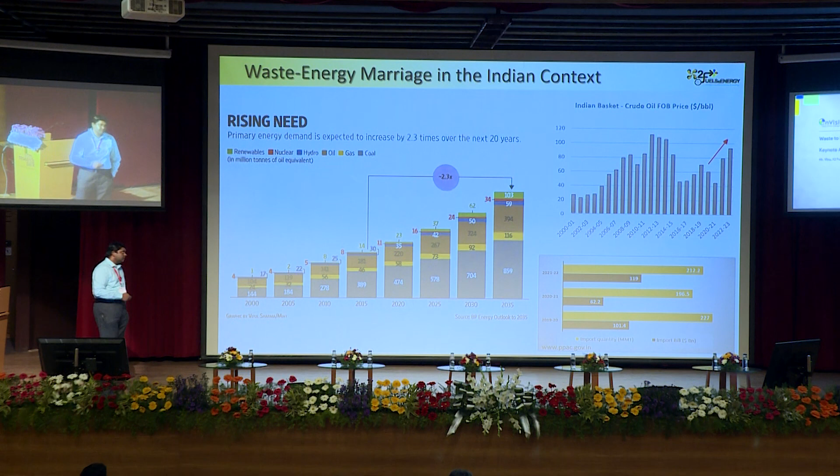So given all this scenario, and I've not really come to the waste part of it - if you consider what this waste is all about, today we generate different types of waste. And if I put all the waste together as something like municipal solid waste, these are the numbers.

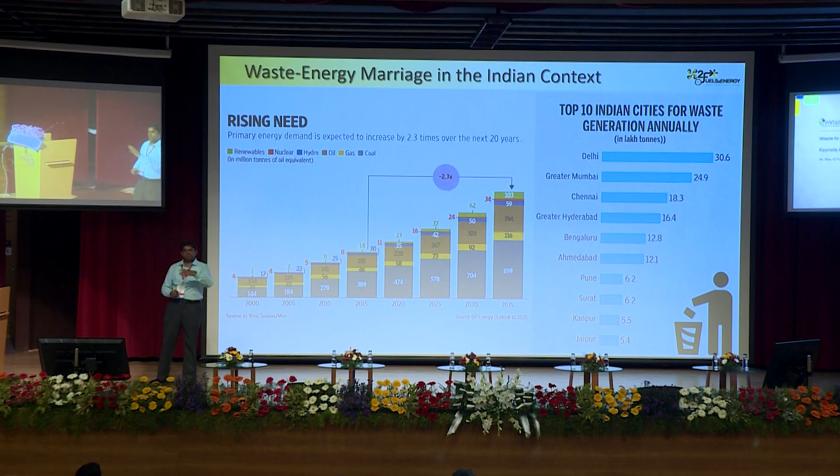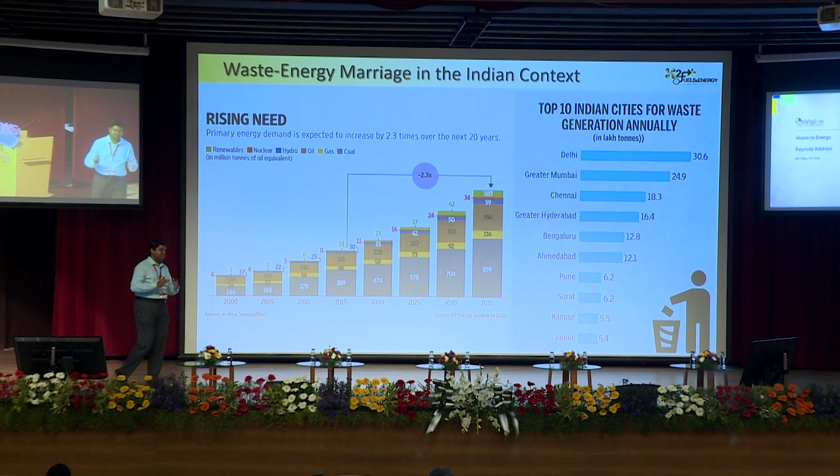The numbers could vary, roughly plus or minus 10% variation from various reports, but today this is the typical figure. For example, if you take Chennai, we generate about 5,500 tons per day of municipal solid waste, out of which roughly 50% is biodegradable waste, part of which is being composted and recycled, made into some value. And there is also a significant fraction which is plastics and other different types of components.

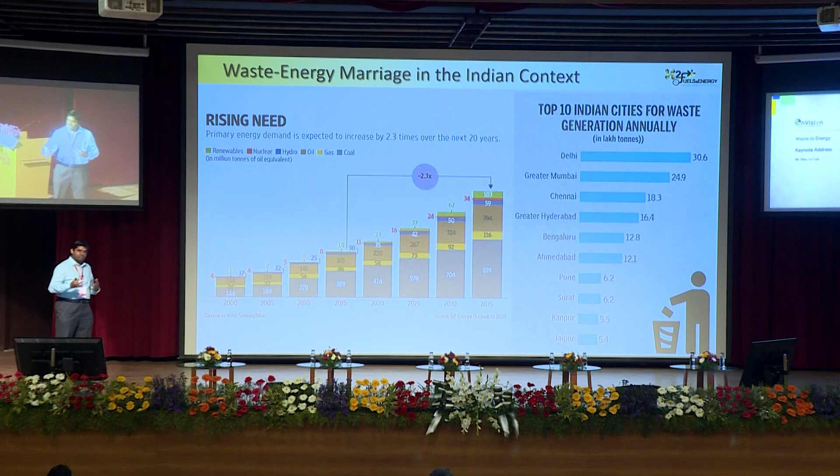Which is going to the landfills, and again, the landfills are getting converted to dump sites. A part of it is also going to some kind of incineration facility or waste-to-energy plants, typically cement kilns. And I think this is the typical Indian context.

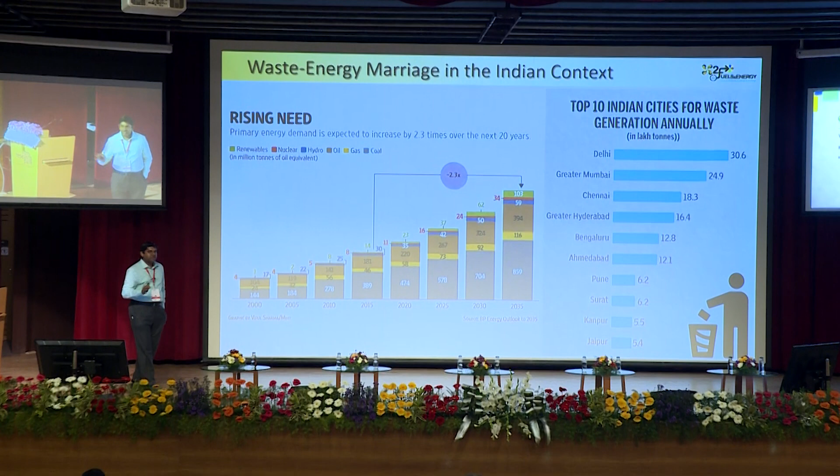If you look at this in a bigger perspective, I think this is not just applicable to Delhi - the Delhi Ghazipur landfill is always talked about, but every other metro city has a landfill, and the garbage is only piling up. If you look at this whole scenario of waste, are we really having a clear plan of converting the waste to any kind of value or even energy?

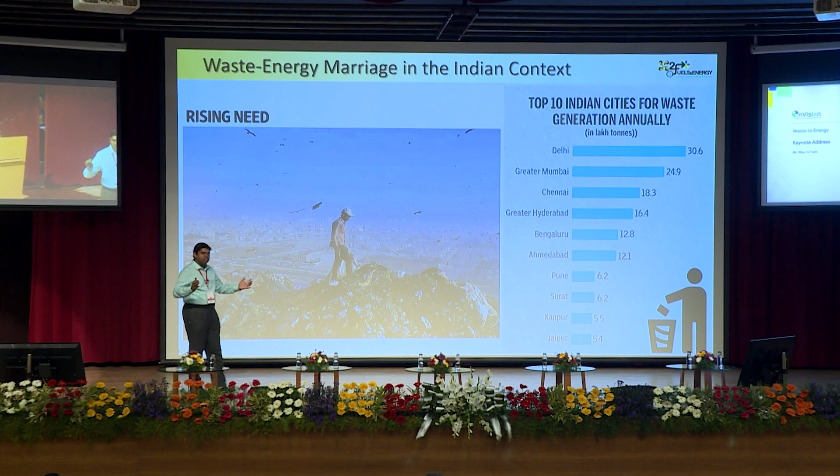I would say no. These are not really done at a very global level. Even if you look at the 500-page report of the International Energy Agency, you will hardly see waste to energy mentioned in just 2 places in a 500-page document. So that means there is a huge potential.

We agree that there is a huge potential, but because of the heterogeneity and many other aspects, it is not really targeted towards generating so much percentage of energy over different years.

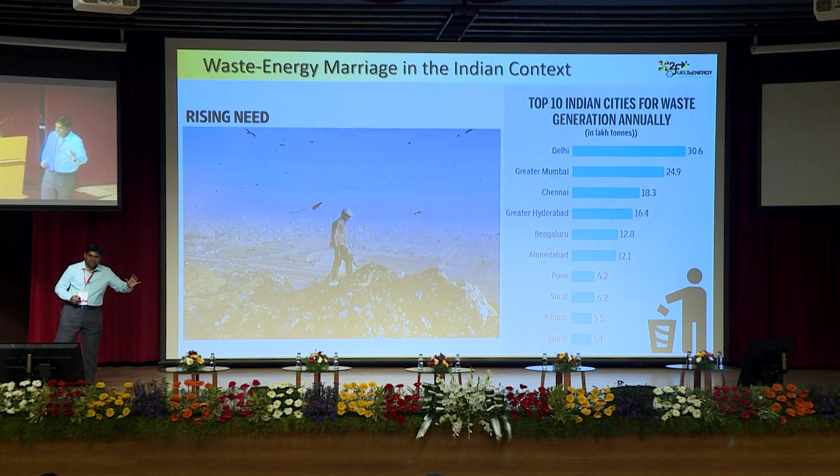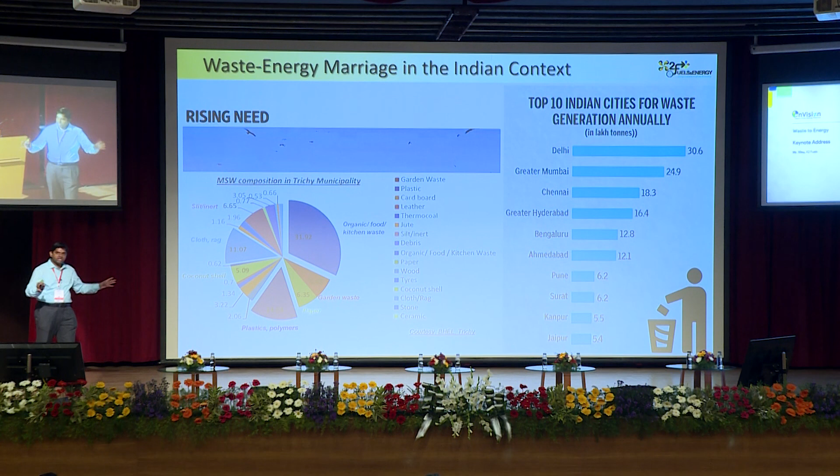So what is this waste all about, right? This is just a snapshot of the waste that we collected and did an analysis on. This is from Trichy. You can see that it is not just bioorganic or biodegradable, and non-biodegradable glass and metals - the 4 typical classes in which we segregate the waste at our home and dispose it off. It is much more. A typical waste is composed of too many different components, and remember, all these are actually there in the pile, in the landfills. You have past sins, current sins, and future sins that are also going to come up.

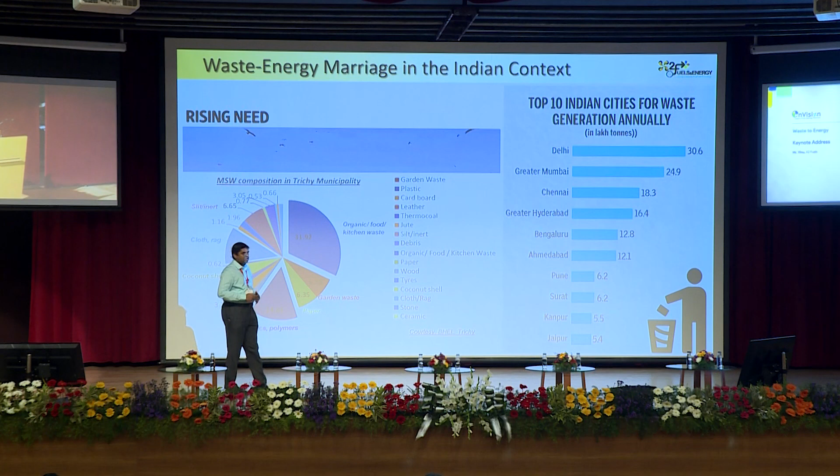So the problem is really big. What are we to do about this in terms of converting it to anything that is valuable? We, as a startup company, started in 2019 based on some of the early results we got from IIT Madras, and we work on a technology. I would also like to use this platform to popularize what we do, even though there are other tech options.

So we are trying to actually mimic nature's way - how nature has been converting a variety of fossil matter into crude oil, natural gas, and coal over millions of years. We try to simply do it on the ground over 15 minutes to half an hour, through a process called hydrothermal liquefaction.

The process is very similar to this, but the technical detail is that we try to pressure cook the material or feedstock, whatever be the waste - any carbon, hydrogen, oxygen, nitrogen, sulfur containing components. Let it be a mixture, let it contain water, it doesn't matter. We put it together in this glorified pressure cooker, as we call it, and cook it at around 300 to 400 degrees C, with pressures typically about 200 bars.

And when we do this over the ground, typically in about 15 to 30 minutes, what we get is an oil - this oil is something we call crude oil or crude oil equivalent, bio-crude. There are many different names for it, but this is basically the fuel. We try to mimic the crude oil that we get from underground, making it over the ground using this technology with different types of waste.

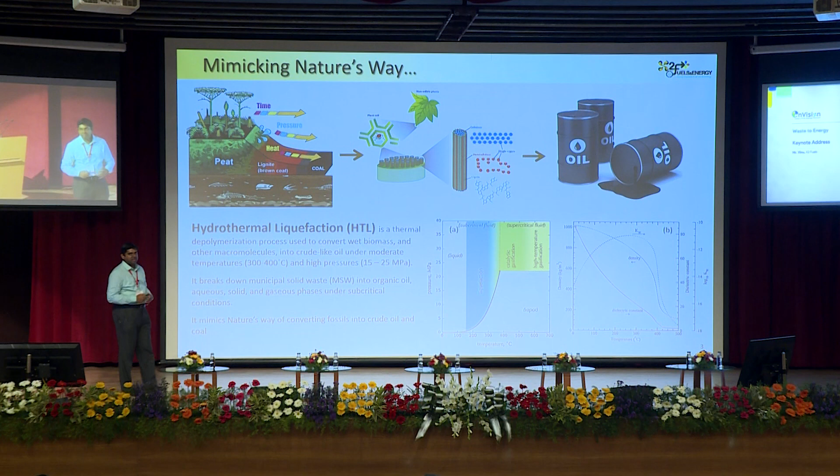So what are all the different products? Do we get only oil from this process? No, we get different product phases. We do get an oil, which is our key product. The next one is a solid residue, just like a coal or a biocoal, biochar - whatever solid residue, that carbonaceous matter you can talk of. So it has some applications in electricity.

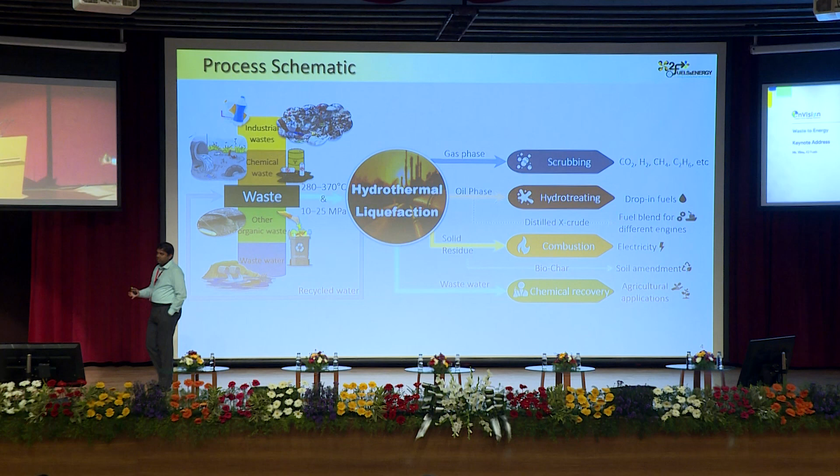That's like a low-hanging fruit, but we try to really valorize it and get it converted to activated carbon in such forms. We do get a gas phase, but again, the gas phase is not going to be composed of any typical incinerator gases like NOx, SOx - those kinds of gases do not form. It is going to be some amount of CO2, but I'll come to the point that we can still acquire carbon credits by doing this as a whole process.

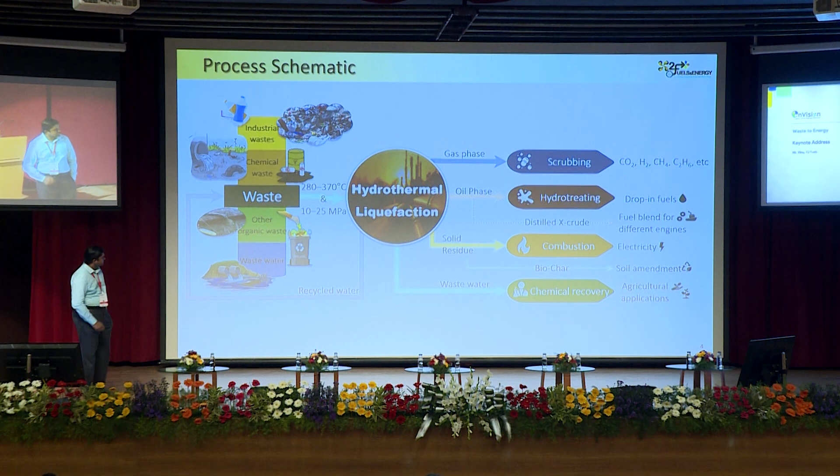And we get wastewater, which can be recycled, or used for a variety of agricultural applications. The process really stands out - it's a feedstock agnostic process. That means it's not a process just for biomass or plastic or anything like that. It can be used for any kind of feedstock, which is something we have validated in the lab.

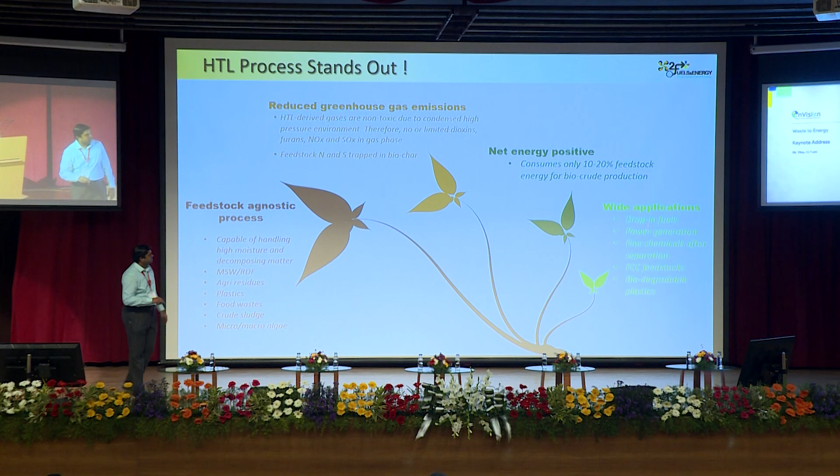The process is net energy positive. Typical process efficiencies would be about roughly 60%. Wide applications - as I said, the products have a variety of applications. This is just data to show that we have been dealing with a wide variety of feedstocks, including real municipal solid waste collected from dump sites and landfills, some industrial waste combined with wastewater put together, lignin which is a paper and pulp industry waste, and so on.

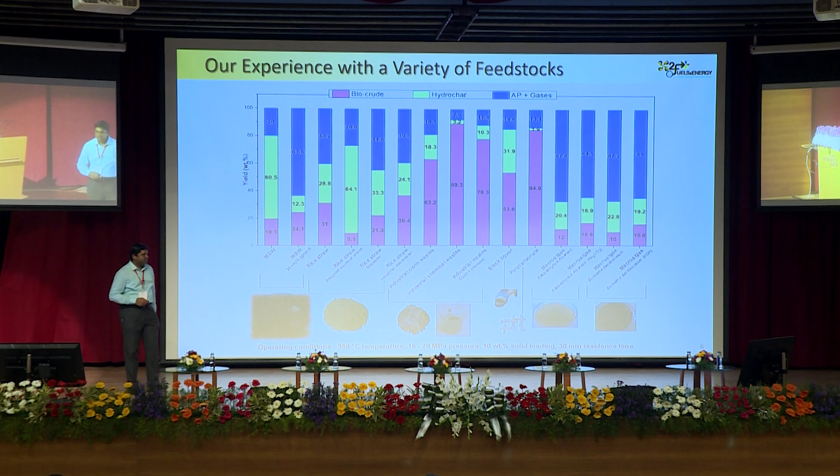What do we get? What is the product like? This is just to benchmark the quality of the products we get with typical crude oil and diesel. So again, we show different types of oil.

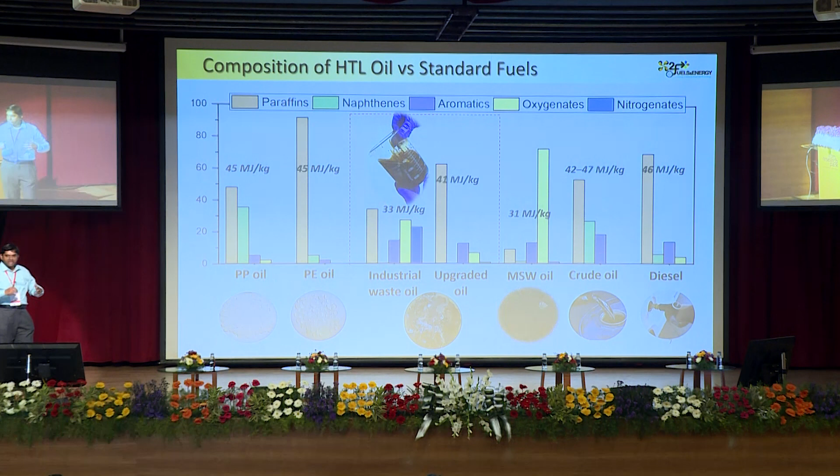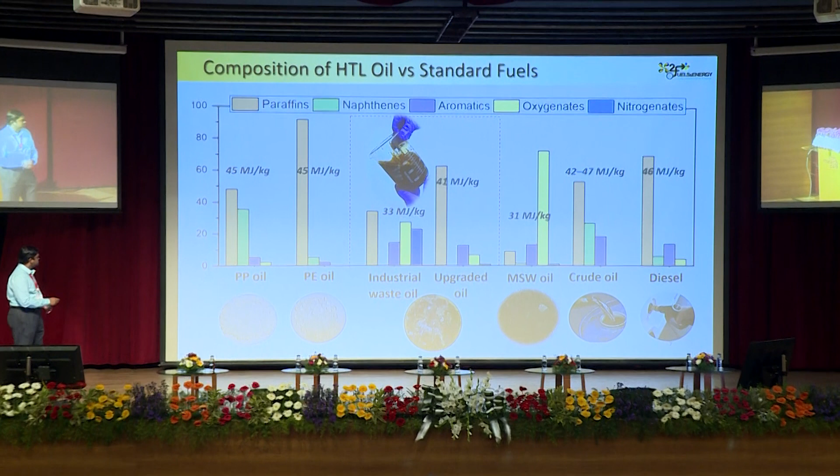So if you're going to derive an oil from, let's say, polypropylene or polyethylene, typical plastic packaging waste, because these are made from hydrocarbons, we recreate the same hydrocarbons. So we get oils which are typically of good quality from the plastics.

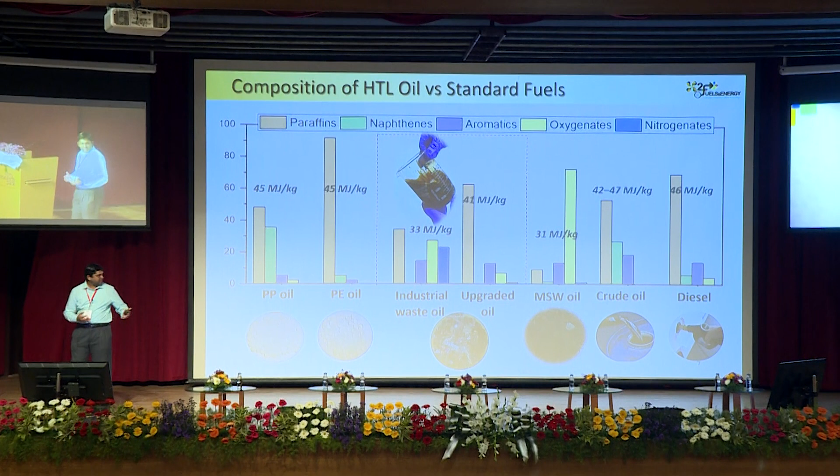If you take an industrial waste oil, which is a waste from one of the manufacturing facilities near Chennai, we convert this to an oil, and we can actually upgrade it, improve the quality by doing some upgradation strategies. We get it close to a crude oil.

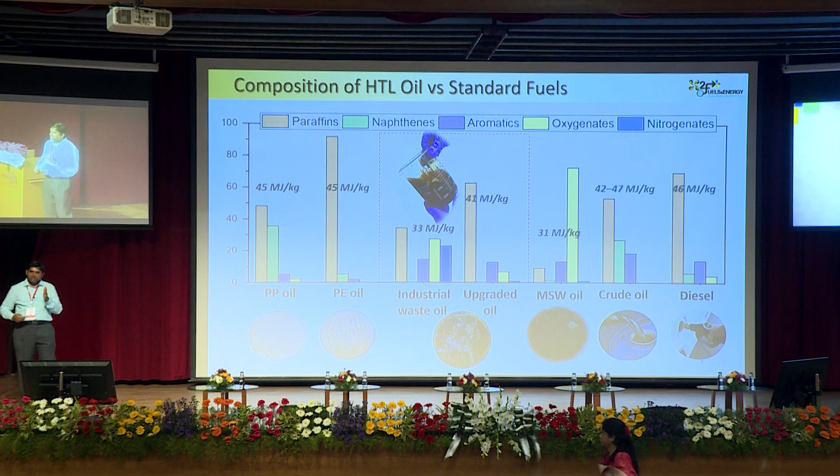Or if you take a municipal solid waste from a landfill, we get an oil of this kind of quality. So the oil quality varies, but we actually know what is a typical range in which the quality is going to be varying. So we can actually propose solutions in terms of the kind of waste that is going to be generated, be it in an industry or an apartment complex or anything like that.

Basically this is to reinforce the fact that we are today thinking of commercializing the products towards making marine fuels. That's one of the opportunities. Of course, heavy fuel oil is something that we are already doing, and we are confident of the performance of the oil that we make in the engines.

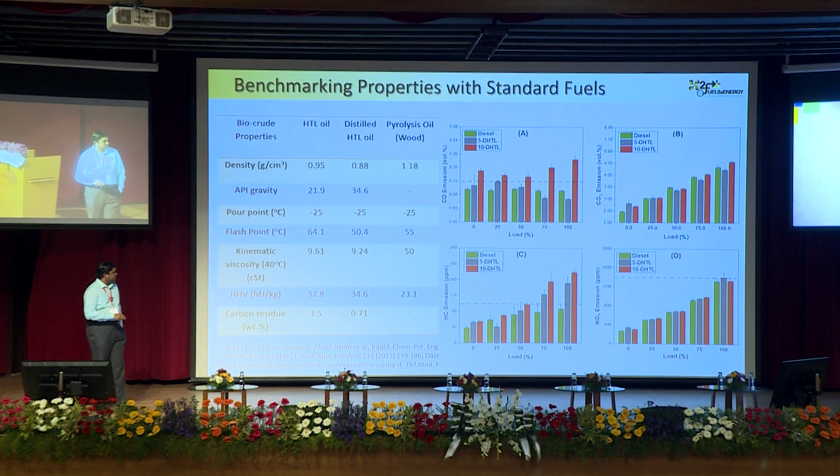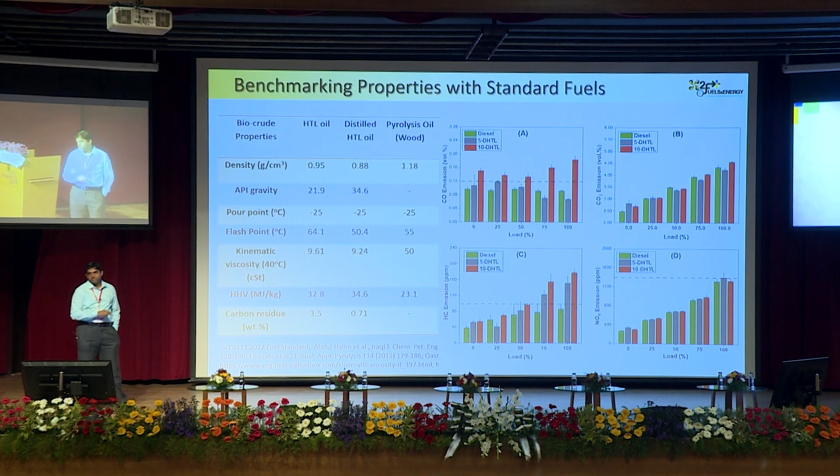There are also some data to show that if you're going to blend it at even 5% to 10%, the raw oil actually gives a very similar performance as compared to 100% diesel in typical diesel engines.

Finally, what is the economics? How does the economics work? This certainly follows the economies of scale. We have actually worked out the economics in different stages. I initially said that Chennai generates about 5,500 tons per day. So if we have to really target that scale, that means we need to be thinking of something like a plant that would take up about 500 to 1,000 tons per day. But we are actually at a scale of about 10 tons per day, which is something that we are currently developing.

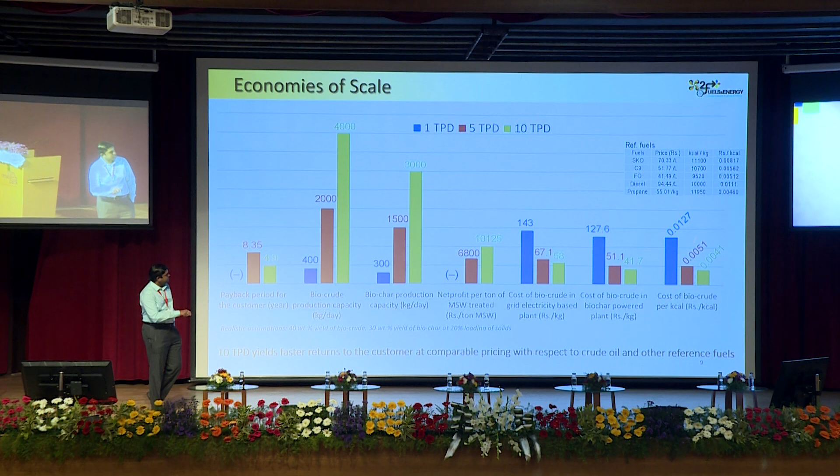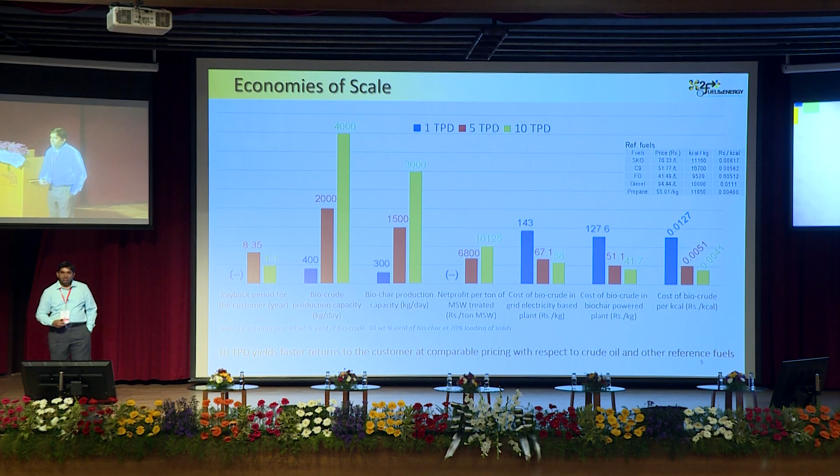We see that even in terms of the energy price of the oil, if you're going to compare the price of the oil with respect to any of the conventional fuels on an energy basis, it is certainly comparable with a typical fuel oil or even up to a kerosene grade oil that the refinery is today producing.

Our journey so far has been like this. We still do a lot of R&D in the lab scale at IIT Madras, that's all done by our project staff and students, PhD students. We have demonstrated a 100-liter batch, slightly a bigger pressure cooker.

We are developing a 1,000-liter per day facility, which is roughly about 100 kgs per day, which we are setting up in the IIT Madras Discovery Campus in Thaiyur. And this is actually a work in progress, so we are essentially deploying this in our investors' facility in Avadi, where the industrial wastes are generated at about 5 tons per day.

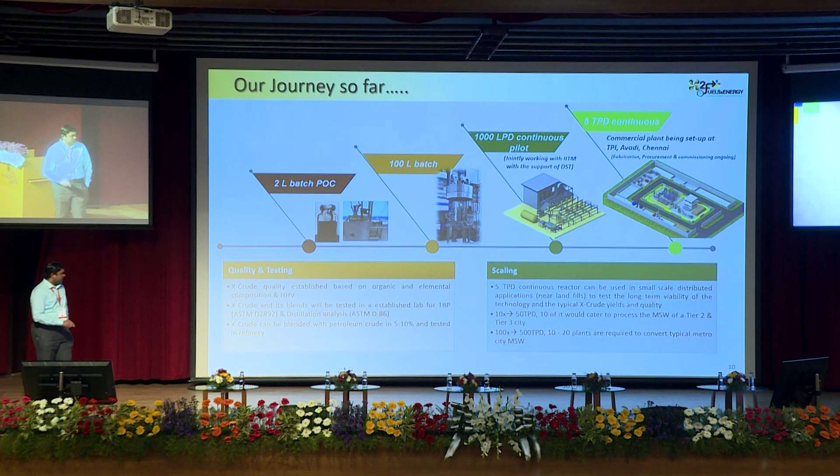So this has been our journey, and as I said, if you have to target a typical metro city, we have to be talking about something like a 500 tons per day plant.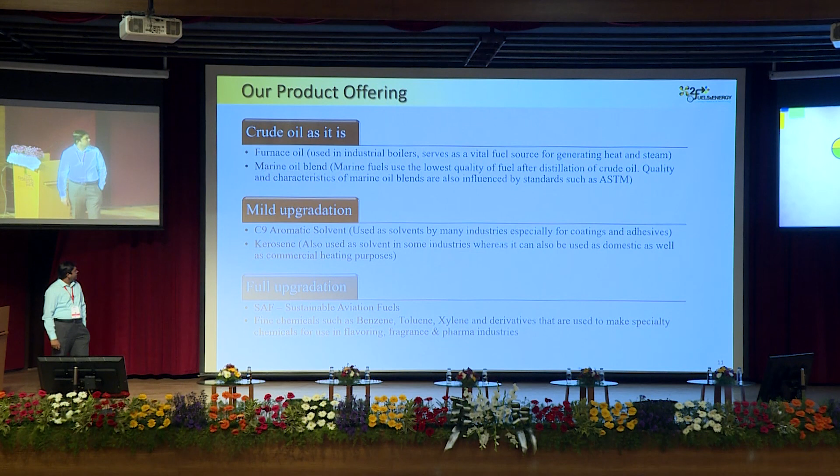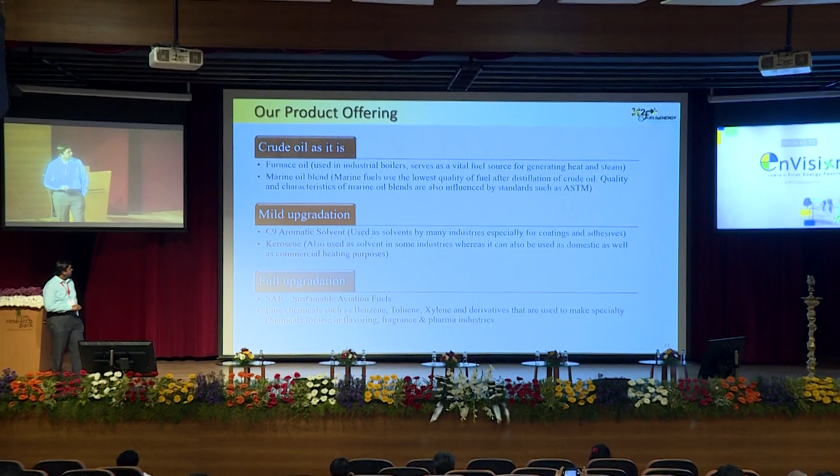Product offering: crude oil as it is. As I said, furnace oil, we have tested that the furnace oil can easily go as a blend with even up to 10% without upgradation. But with upgradation, it can replace 100%.

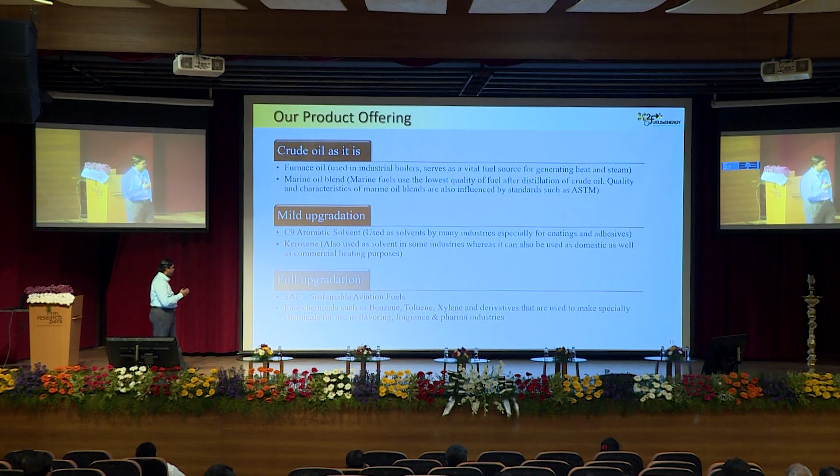Mild upgradation, we can upgrade it to C9 aromatic solvent, which is used by a variety of industries for coatings and adhesives. Kerosene also as a solvent in a lot of industries. Even our mosquito repellents have about 95% kerosene.

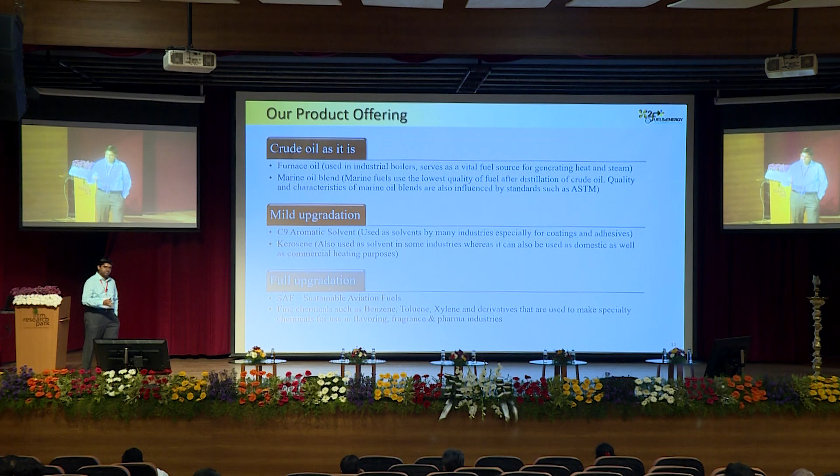Full upgradation, that's the final target. We could essentially, potentially make sustainable aviation fuels and some fine chemicals like BTEX, which are essentially petrochemical products.

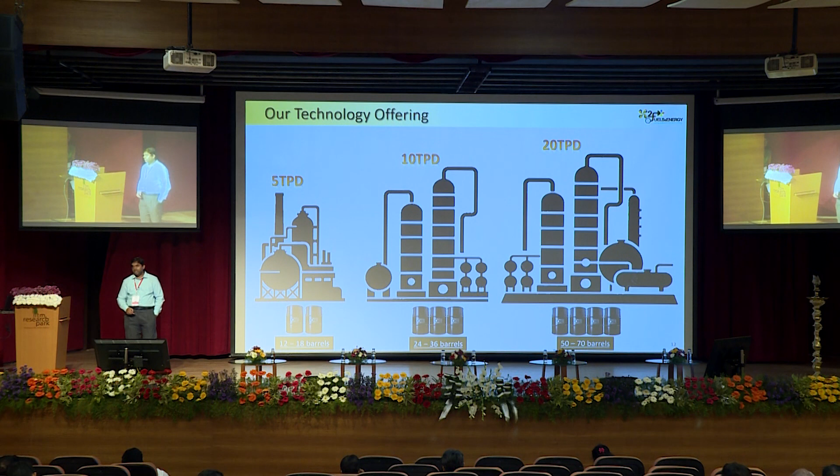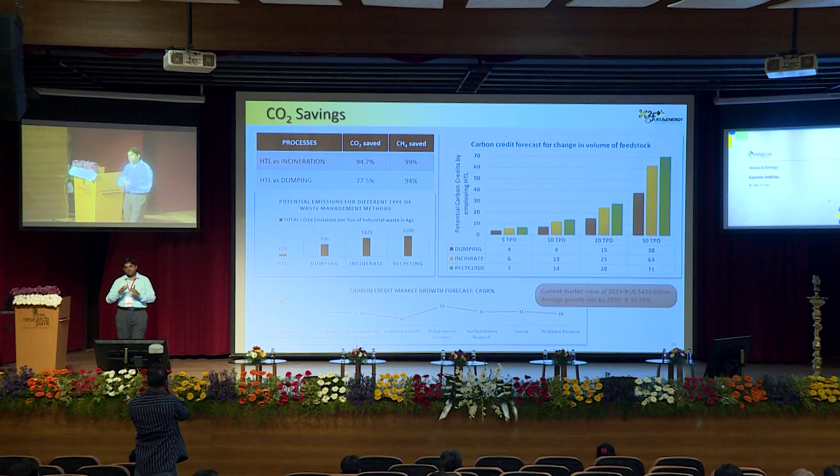Finally, this is about CO2 savings. I'm sure I have to do due justification after Rajneesh spoke about CO2 in the previous talk. So our points of comparison are usually simple dumping in the landfills, incineration, simple burning, and recycling without converting the plastic waste or the municipal solid waste to any other products.

So we do actually see a good potential for carbon credit, because the carbon credit market is actually going at an average growth rate of about 30%. So HTL can certainly be a very good technology in terms of saving a lot of CO2 that is going to be emitted otherwise.